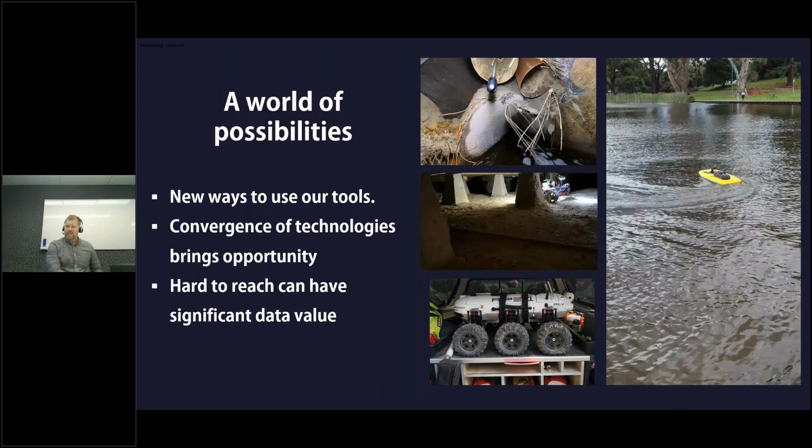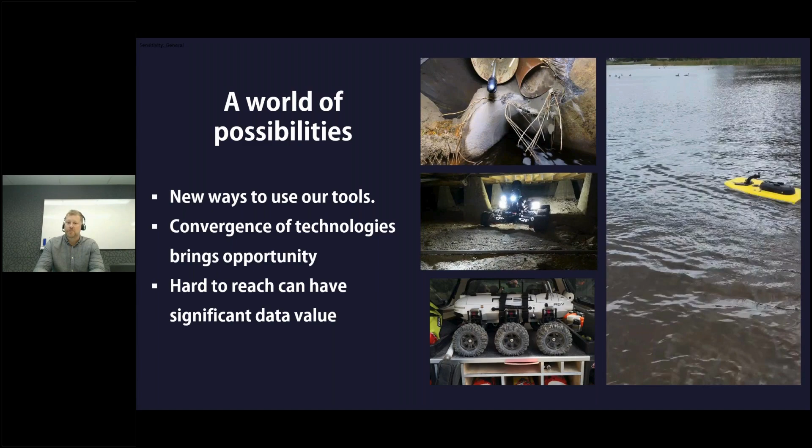This passion has led me to pursue new ways to leverage advanced data acquisition technologies such as 3D laser scanning and other measurement sensors, to open up new work fronts and enhance safety, accuracy and efficiency of our survey processes. As a technology enthusiast, I find the recent advancements in our field incredibly exciting. This enthusiasm is not just limited to adopting new advanced reality capture tools, but extends to inventing new ways to use the tools we have at our disposal, thereby enhancing them.

So in 2016, the world saw the launch of the BLK 360, the smallest commercial 3D scanner ever. This technological advancement, combined with the spread of other technologies such as 3D printing, open source hardware and software, cheap sensors, and a vast array of adaptable and compatible components, has opened up a realm of opportunities.

Whether you need a quick solution or something bespoke that's not available off the shelf, the merging of these technologies has extended the reach of reality capture, limited only by your imagination. Developing new methods to apply measuring devices like a 3D scanner in hazardous situations, tight spaces, and environments that we want to avoid, but where the data gathered is useful, provides significant value, and is where the survey industry can discover new possibilities.

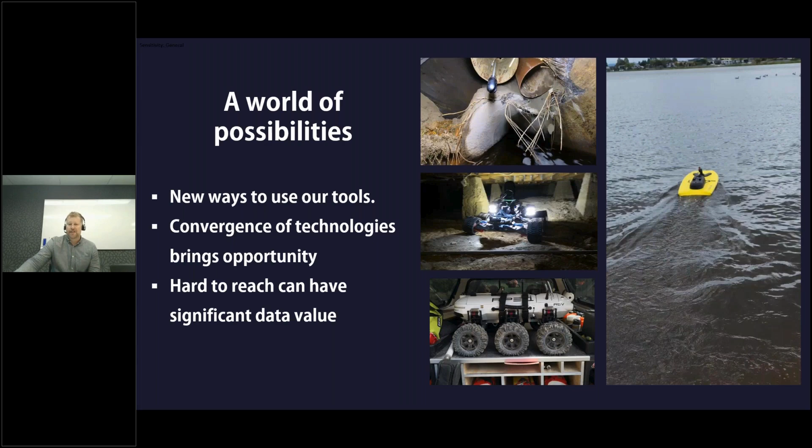It is this passion for innovation that Beca has supported me with to develop PIPE-i, our in-house survey robot, a project that represents the culmination of significant effort and creativity. Today, I'm pleased to share with you the journey of PIPE-i so far. I'll run through some of the history, how we got here, talk about some of the design considerations and PIPE-i's features, some of the things we learned along the way, trials and tribulations, and some typical project examples of how it's demonstrated value, and a bit about what the future might look like with this type of technology.

So the story of PIPE-i started with dangerous environments. Unsurprisingly, the request for measurement data in environments that are not safe for our people to enter is increasing, largely due to our ever-improving health and safety culture. Our perception of what defines a dangerous environment has changed, and we no longer treat many of these areas like we used to.

A few years ago, when I was struggling with options to survey these environments safely, I found it surprising that the survey industry was at the time limited in options to complete measurement surveys remotely out of line of sight when ground-based operations were best suited. Aerial drones or unmanned aerial vehicles had the skies covered, tremendously successful in many ways, primarily allowing the surveyor to stay in a place of safety while the drone does its work. But there wasn't much going on in terms of a robotic vehicle that could measure stuff remotely.

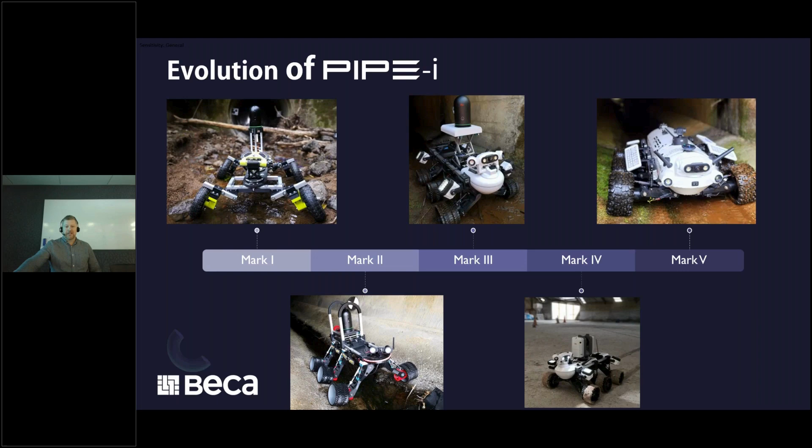So from this to this. I guess there are some similar features that carried through from the first motorized version to today's model, but PIPE-i today is a significantly enhanced and more capable machine.

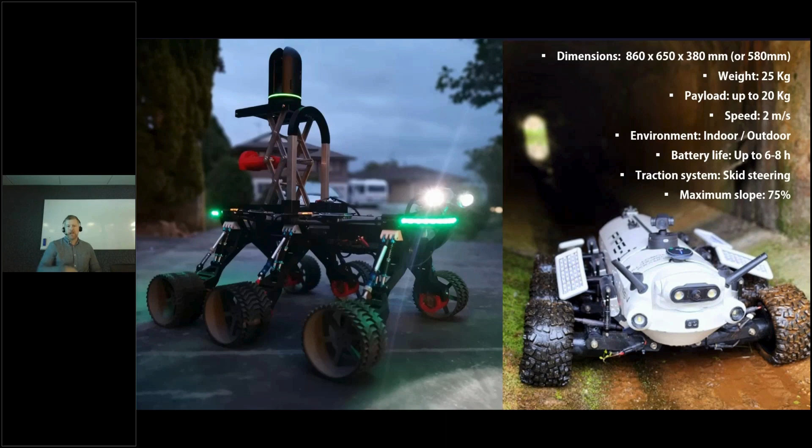PIPE-i's features listed here are the sum of several years of trials, successes and failures on design on actual projects. So I mentioned the Wi-Fi signal. Now that PIPE-i had an upgraded radio system up to 10 kilometers in range, we couldn't be constrained to a 30-meter range to control the scanner.

Lighting was a major consideration for these dark spaces, and the more lighting you can get, the better, improving the inspection imagery, colorization of the point cloud, and all-round quality. Point clouds are really challenging to register in these environments.

The robot has an onboard autopilot and a high-performance control system designed for advanced drones and robots, enabling navigation and autonomous capabilities in various unmanned vehicles. I'll touch on what this means a bit later.

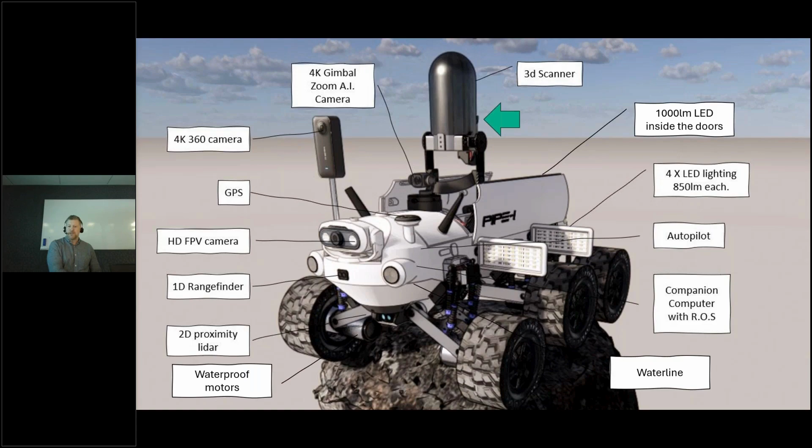The central objective in the design of PIPE-i was to incorporate a scanner such as the Leica BLK 360 as an integral component of the system. We literally started with a model of the scanner and designed PIPE-i around it. The development of this robot had to complement the scanner's dimensions and functional requirements.

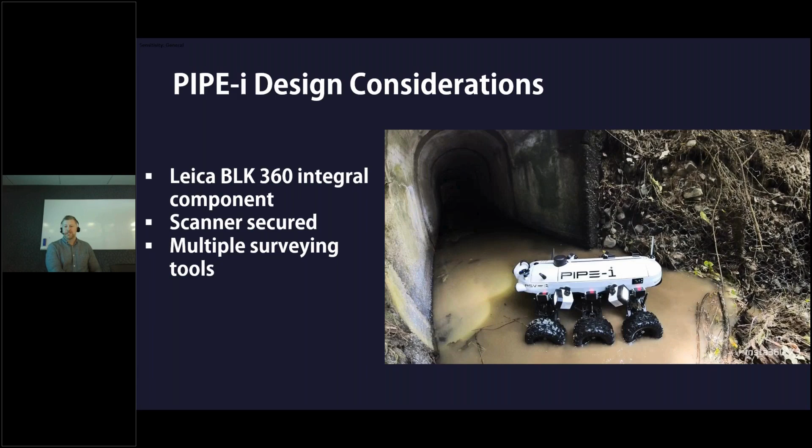A common query I received, and in fact something I've constantly asked myself, is why an off-the-shelf robot hasn't been adapted for this purpose. The rationale remains fairly steadfast to this day. Rather than affixing a scanner to a pre-existing robotic platform, it was important to ensure that the scanner was not merely an attachment, but a protected, integral feature.

This approach allows the scanner to be securely stowed and easily deployed when necessary. Moreover, the design flexibility to remove the scanner cradle ensures that the robot's cargo bay can be adapted for various other equipment as needed, enhancing the versatility of PIPE-i for multiple survey tools and applications.

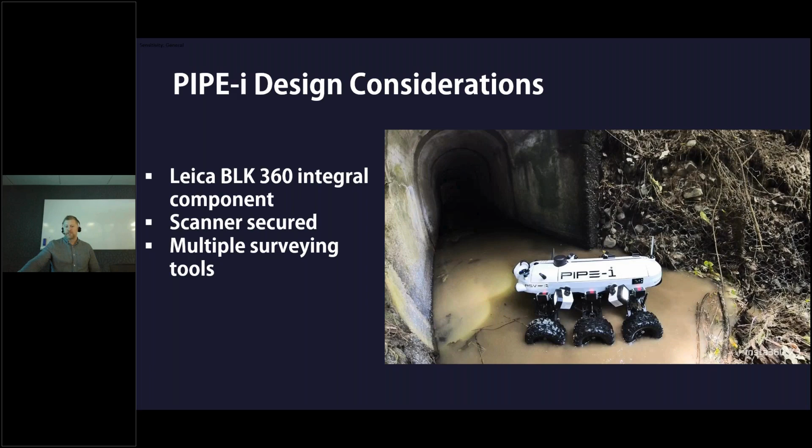PIPE-i's construction prominently features 3D printed components. A project of this nature, leveraging 3D printing technology, would have been impractical 15 to 20 years ago without significant dependence on specialist manufacturers and likely prohibitive cost.

The use of 3D printing technology has been pivotal. It has facilitated rapid prototyping, allowing us to assess the fit, the durability and performance of components, thereby quickly iterating through design modifications. The use of robust plastic filaments such as polycarbonate and nylon means the parts we produced are not only quick to fabricate, but also remarkably resilient.

3D printers have come a long way, particularly in the last year or so. The speed is a major improvement. Now they are capable of up to 6 times faster. In this video, the speed looks almost unreal.

While these 3D printed materials don't match the strength of aluminium or injection molded plastics, they meet the necessary load bearing requirements for each specific application within the PIPE-i. For components requiring finer detail, resin printing was utilised for precision.

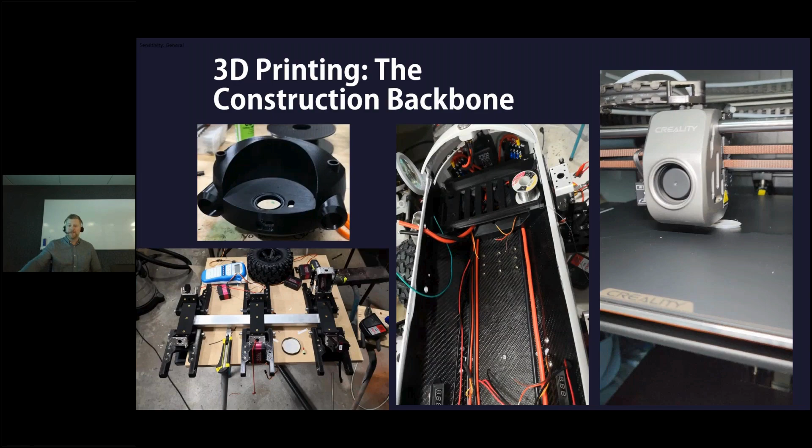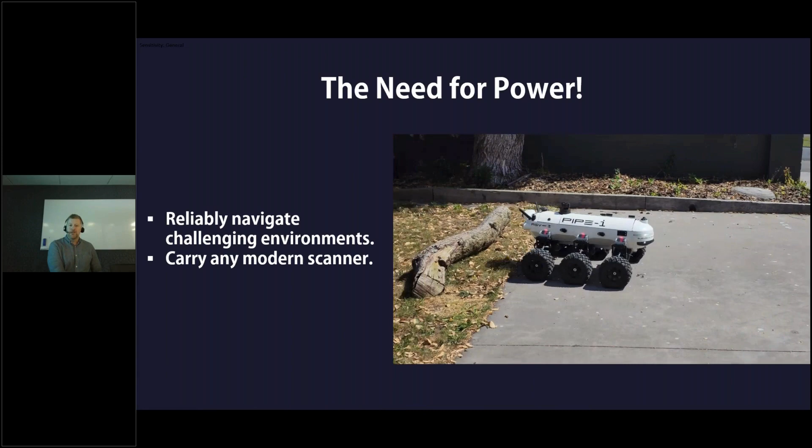PIPE-i's strength was a critical design factor due to the high torque output of its drive system. Earlier models of PIPE-i lacked the necessary power to reliably navigate challenging environments. The current iteration is equipped with 6 200mm diameter wheels, each driven by really high torque DC motors, allowing it to overcome most obstacles with ease.

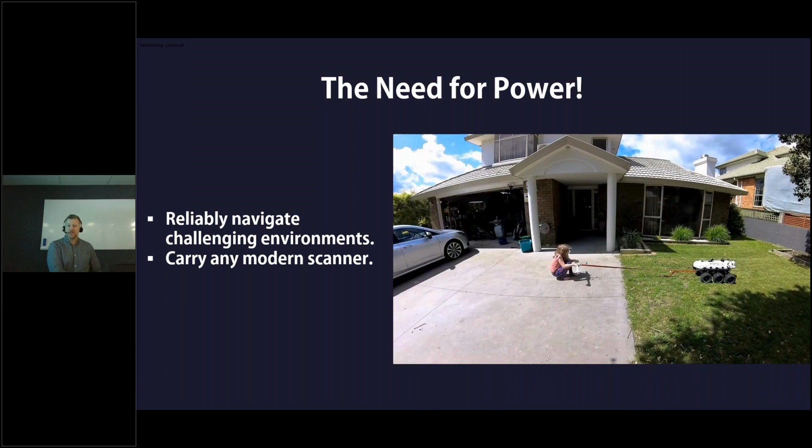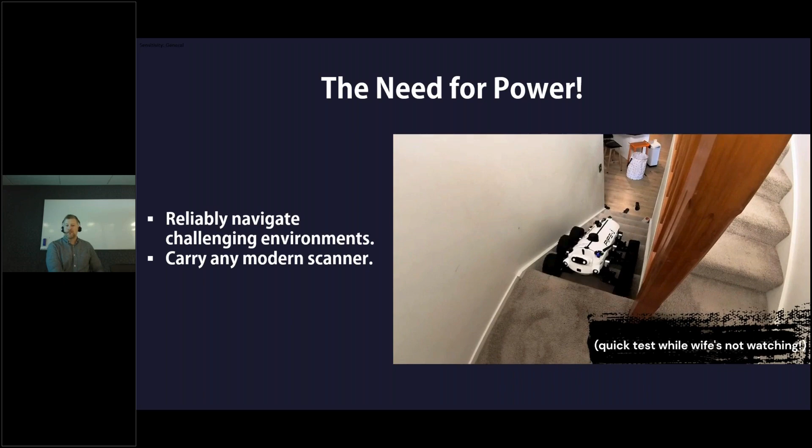With a total weight of 25 kgs, PIPE-i boasts approximately 30 kgs of pulling capacity. This robust construction makes it capable of carrying advanced scanners like the P40 or the RTC 360, in fact probably any modern scanner. While it's not designed for stair climbing with such heavy payloads, PIPE-i could perform reliably on moderate terrains.

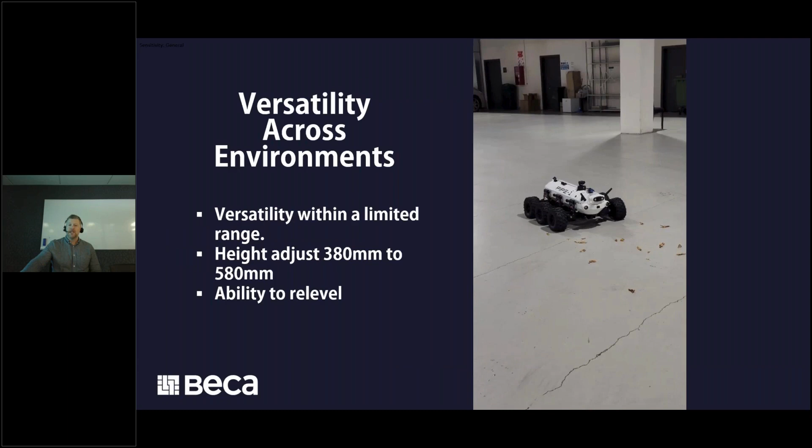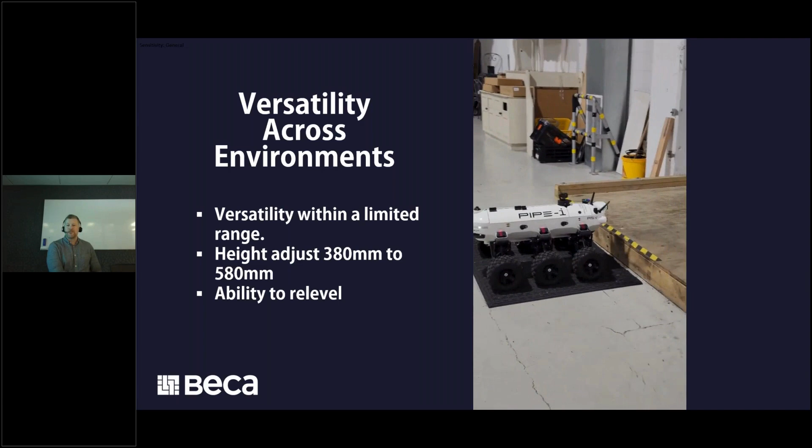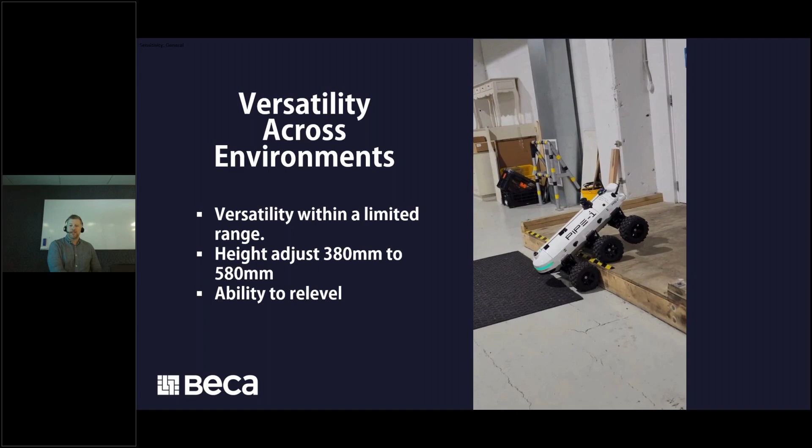Developing a single robot capable of functioning effectively across all environments is a major challenge. The most viable approach was to strive for versatility within a limited range, specialising in inspection and measuring. The concept of adaptability across multiple environments stemmed from insights gleaned from past iterations.

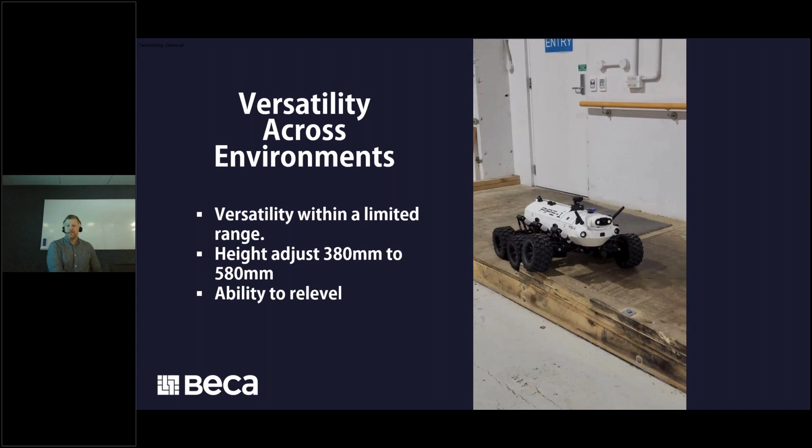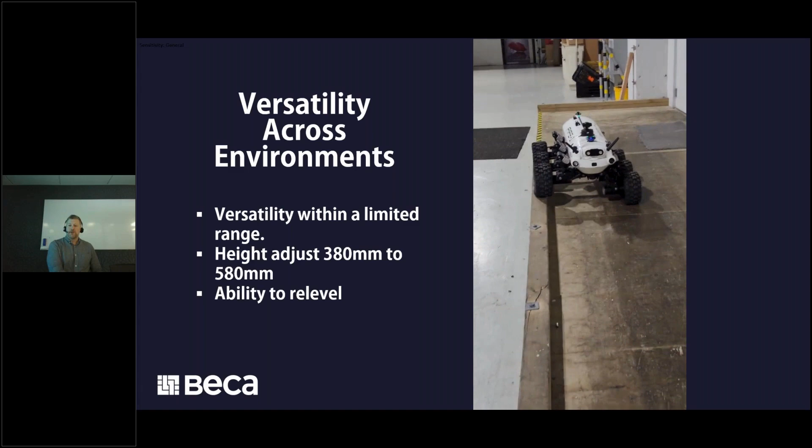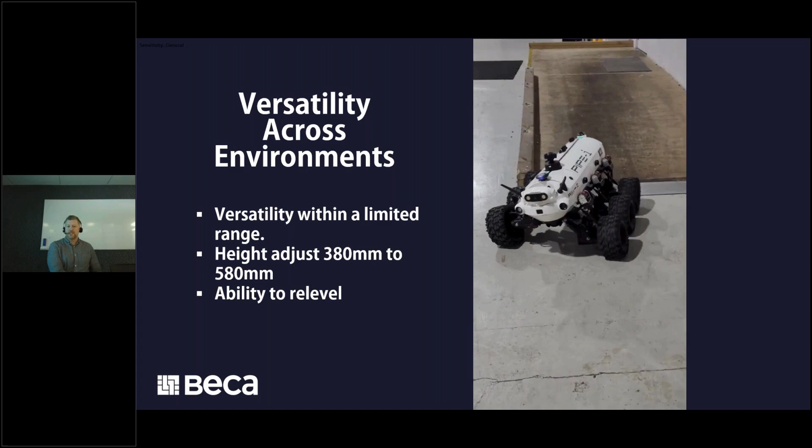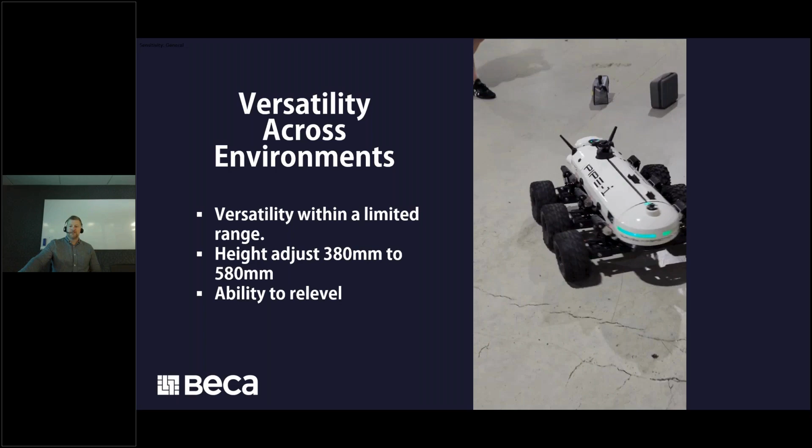Initially, the focus was on designing for culverts, but demands emerged for surveys of underfloor spaces, for example. Thus, the capability to adjust its height between 380 to 580 mil proved invaluable, enabling the robot to maintain elevation to navigate through moderately flowing culverts or minimize its profile when operating beneath buildings. An additional benefit was its capacity to re-level itself and the scanner if necessary.

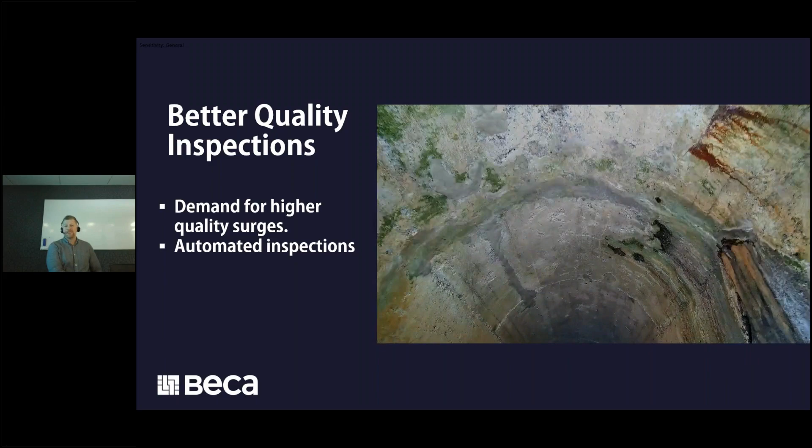Naturally, with these things, the more data that becomes available, engineers develop an increasing appetite for it, and the demand for higher quality surges. To meet this need, a 4K gimbal camera was introduced to facilitate more detailed inspections. The interesting thing is, now we have a programmable gimbal camera, much of the inspection can be automated.

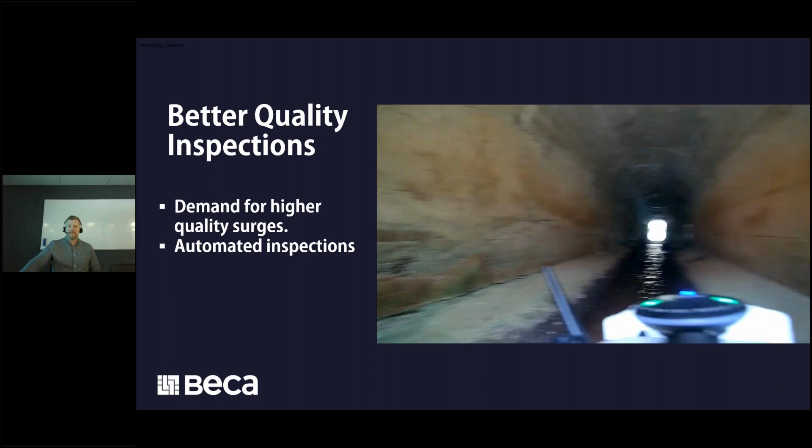PIPE-1 has been utilised in several projects where assets have deteriorated to the point that it is no longer safe for inspection engineers or surveyors to enter these confined spaces. The environments are typically culverts, and on several occasions these projects become monitoring exercises where we establish a baseline set of measurements and measure if there is any change over time.

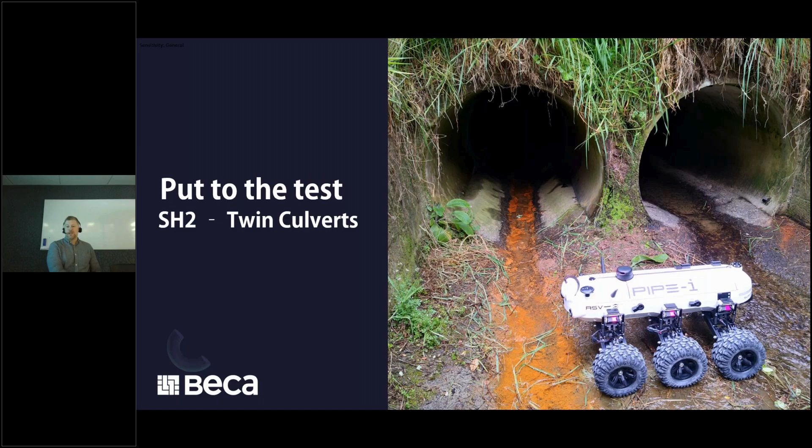The example I talk about now, there was over 140 metres of culvert pipes and structure that needed to be measured and inspected under State Highway 2, in a real-world scenario where significant slips had affected a major state highway. The engineers required inspection video and spatial data to understand the performance criteria of these culverts and also try to figure out where the source was that was causing ongoing erosion.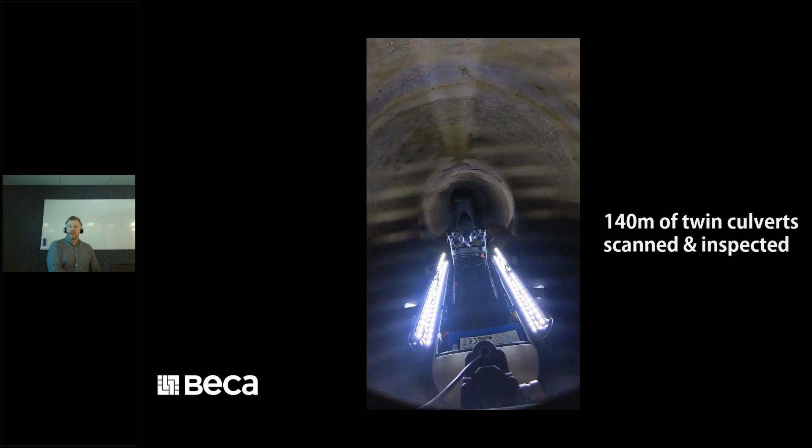This is a time-lapse video of the robot scanning inside the culvert, and it's all completely manually done, but out of line of sight. The scanner is activated every 5 metres or so, and as mentioned, it's a challenge in these environments to register the cloud.

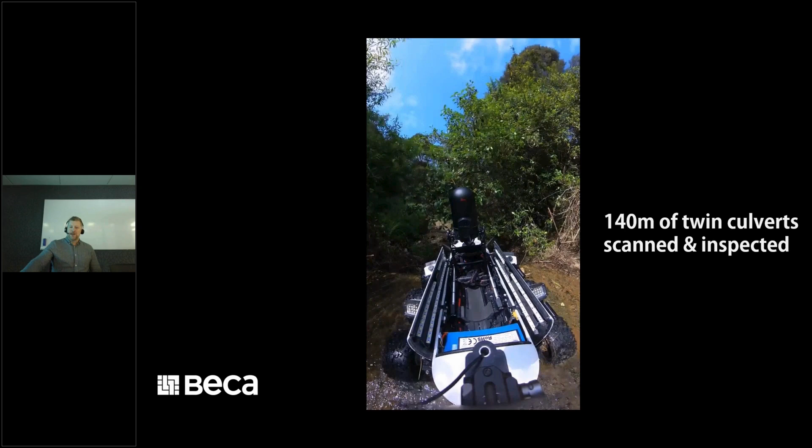In this example, the sweeping nature of the culvert was handy to provide some certainty about longitudinal positioning of the cloud. We established control at the ends of the run only, so we have to accept some inaccuracy in the middle, but with decent 50% overlap, the cloud-to-cloud solution can be reasonable.

This is just an output from the scanning operation. As I mentioned, it takes quite a bit of effort for the cloud-to-cloud registration. You can see the fixed control at each end.

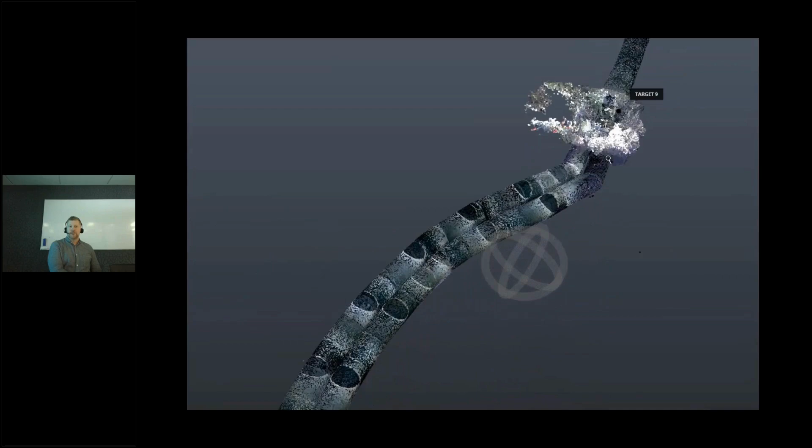This emergency job, this is a new job, another culvert. This emergency job really epitomised the value a tool such as PIPE-i can deliver. A culvert that was at risk of imminent collapse, too dangerous to enter due to confined space. Accurate data was needed to confirm the engineering solution.

The engineers needed accurate information of the inside of the culvert to support the fabrication of a steel sleeve. We were able to measure the entire culvert to within plus or minus 10 mil, providing certainty around what the minimum cross-sectional profile was. The hard data meant that the engineers made an informed decision on the design being fit for purpose and have full confidence that the sleeve will fit, avoiding unnecessary risk to personnel and delays to road users.

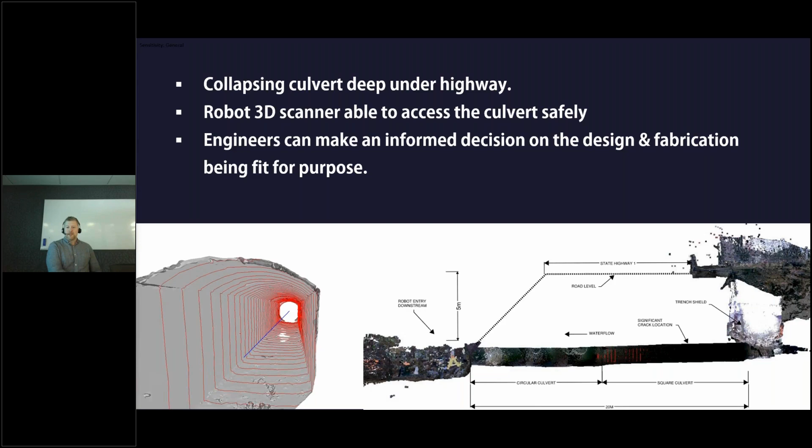In this example, PIPE-i was used to gather data inside a heavily corroded warehouse dispatch building, unsafe to enter. This building was near collapse, needing structural intervention. However, no one was allowed in it.

We were able to provide accurate information for the structural engineers to enable the fabricators to fit tailored steel beams at the correct angles, meaning they don't have to spend as much time trying to fit the beams on site. We were also able to identify other significant structural issues the client and engineers were not previously aware of, with all the extra data gathered.

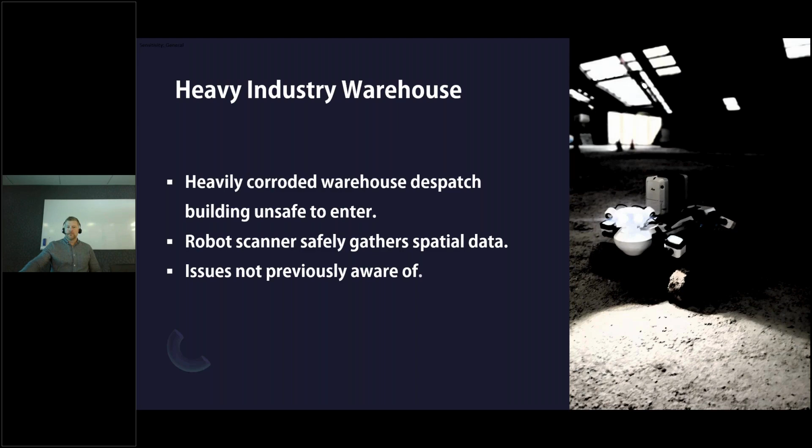In this example, we used PIPE-i to access an underfloor area to pick up visual information about the condition of the piles as well as spatial data for which no record existed. These spaces are commonly dumping grounds for all sorts of stuff and can be quite often contaminated.

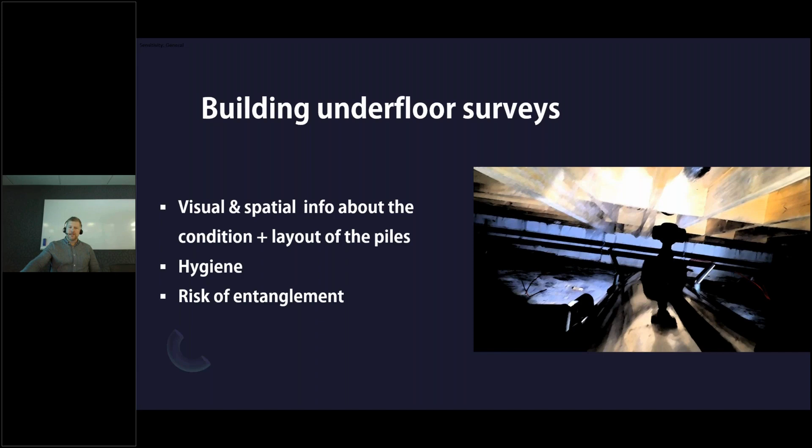Through the various projects, we've discerned direct advantages of employing robotic survey capture, time savings for instance. This twin culvert example was completed in approximately 3 hours. Conducting this conventionally would likely be very challenging, if not impossible. Additionally, the costs associated with setting up confined spaces and rescue equipment would likely outweigh the benefits.

So de-risking the project with the project engineering solutions. By utilizing actual data, we eliminate the guesswork and provide reliable, repeatable, and accurate measurement data. This assurance removes any doubts regarding the hydraulic system performance. We managed to unearth insights, so our approach has enabled us to gather insights that would otherwise have been overlooked.

And of course, enhance safety. Eliminating the need to physically enter these spaces mitigates the risks associated with the hazardous environments. This alternative option provides peace of mind, especially in environments where safety concerns are paramount.

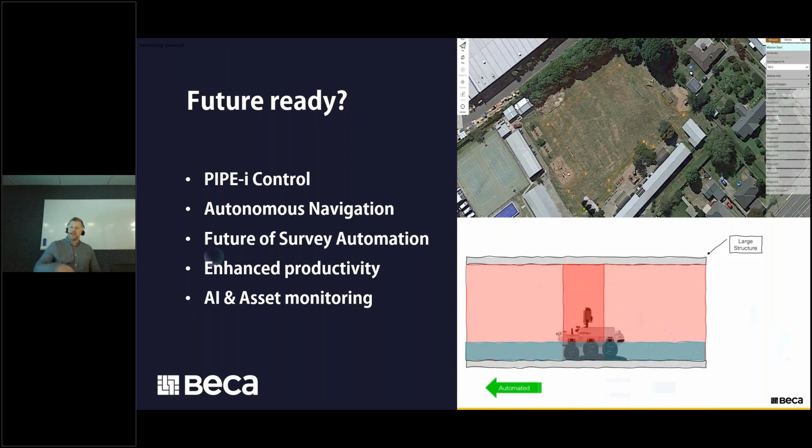These technologies have great potential for asset management. AI and asset monitoring have attracted a lot of interest from various industries. The creation of automated systems that can collect, store, analyze, and report data about assets that are repetitive and linear, such as roads and street furniture, culverts or tunnels, has become a real topic of interest. The combination of robotics, reality capture, and smart AI analysis systems will change the management of assets from a reactive system to a proactive system that extends the life of an asset and provides the best value for the public who depend on it.

PIPE-i started with a very simple concept: how to conduct a survey remotely while the surveyor remains in a place of safety. This became achievable through the convergence of various technologies, which allowed us to shift our perspective. As we adapt to this new way of working, our perspective shifts, allowing us to uncover opportunities that we hadn't anticipated before.

Navigating hazardous environments will persist as a challenge for our business, posing risks to project outcomes and the safety of our personnel, while it's anticipated future regulations will continue to disrupt the conventional approaches embraced by surveyors and engineers. Surveying has a really rich traditional heritage, yet is also closely linked with the progress of technology. So balancing the old with the new is key to capturing emerging opportunities and staying competitive in this constantly changing environment.